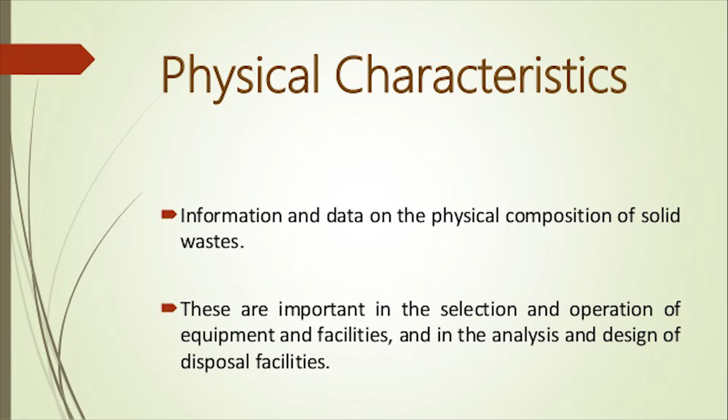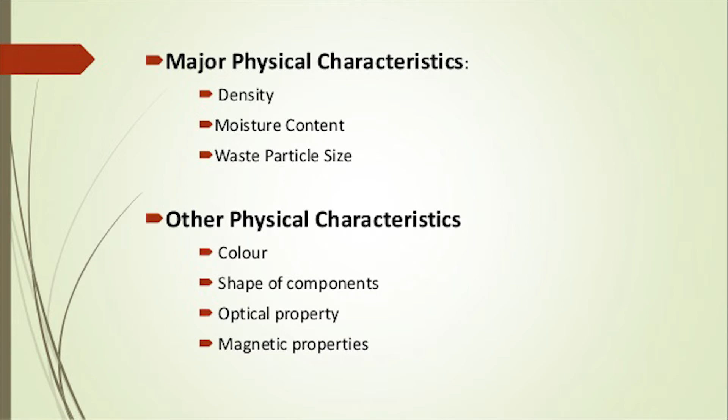The major physical characteristics measured in waste are density, size distribution of components, and moisture content. Other characteristics which may be used in making decisions about solid waste management are color, voids, shape of the component, optical property, magnetic properties, and electrical properties.

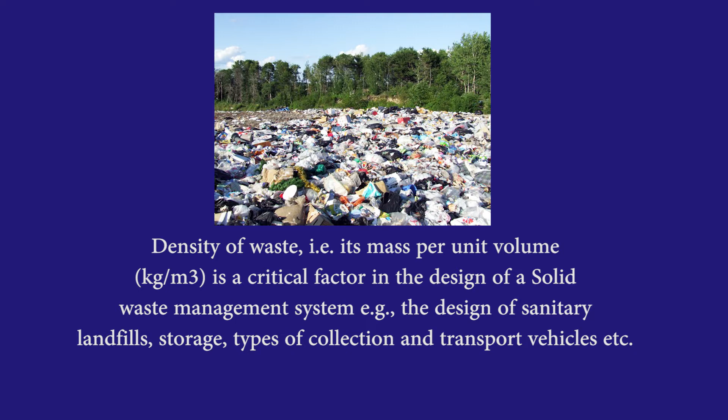Density, or specific weight: density of waste, that is its mass per unit volume, is a critical factor in the design of a solid waste management system. For example, the design of sanitary landfills, storage, types of collection and transport vehicles, etc.

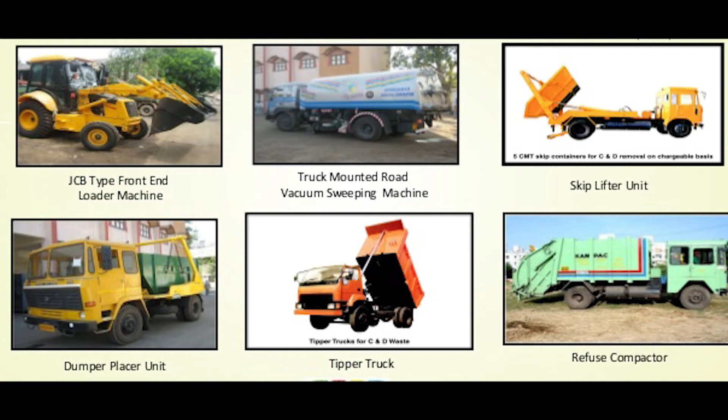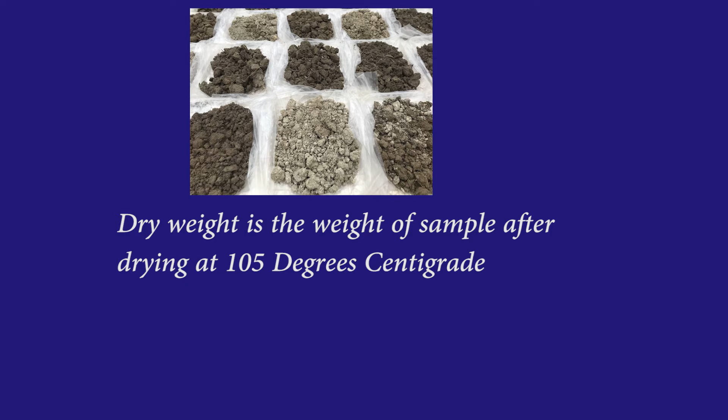Moisture content is defined as the ratio of the weight of water to the total weight of the wet waste. Dry weight is the weight of the sample after drying at 105 degrees centigrade. Moisture content is a critical determinant in the economic feasibility of waste treatment by incineration, because wet waste consumes energy for evaporation of water and in raising the temperature of water vapors.

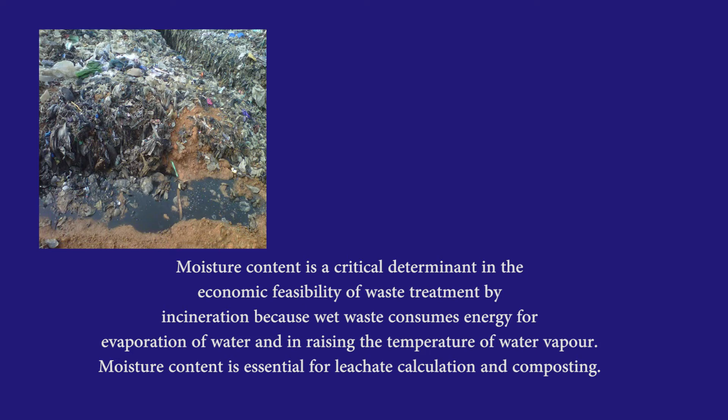Size: the size and size distribution of the component materials in solid waste are an important consideration in the recovery of materials. Measurement of size distribution of particles in the waste stream is important because of its significance in the design of mechanical separators and shredders.

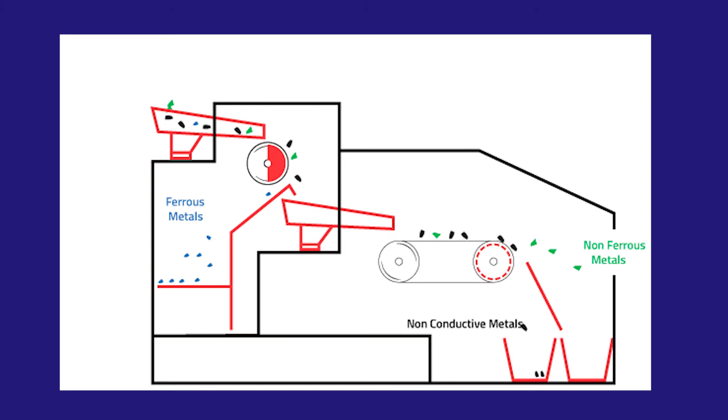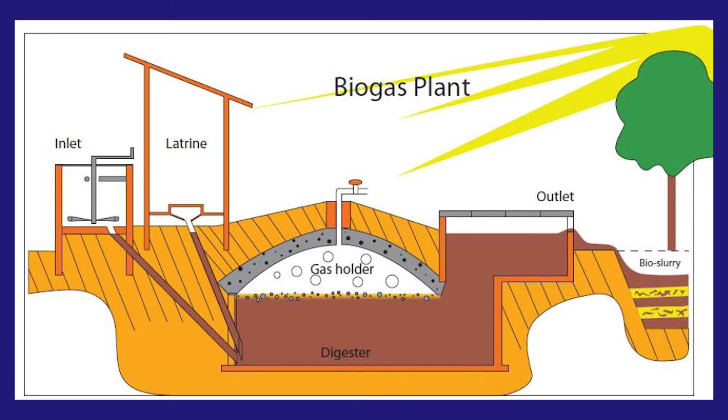Particle size will also influence waste packing densities, and particle size reduction could increase biogas production through the increased surface area available for degradation by bacteria. But smaller particles allow higher packing density, which decreases water movement, bacterial movement, and bacterial access to the substrate.

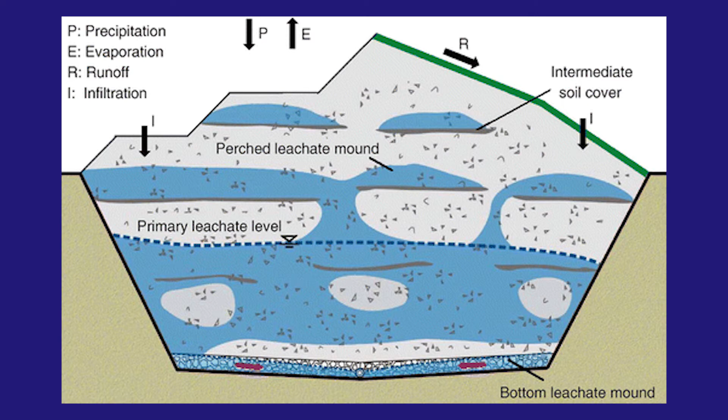Field capacity: the field capacity of municipal solid waste is the total amount of moisture which can be retained in the waste sample subject to gravitational pull. It is used to determine the formation of leachate in landfills. It is a critical measure because water in excess of field capacity will form leachates, and leachates can be a major problem in landfills.

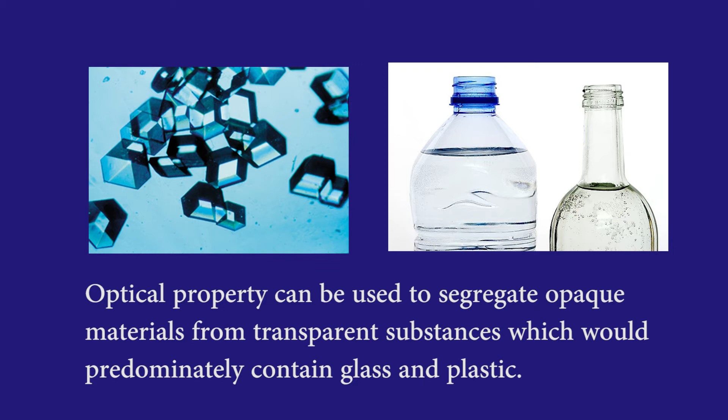Field capacity varies with the degree of applied pressure and the state of decomposition of the waste. Optical property can be used to segregate opaque materials from transparent substances, which would predominantly contain glass and plastic. Magnetic properties are used to design magnetic separators. Shape can be used for segregation, as flaky substance will behave differently compared to non-flaky substance.

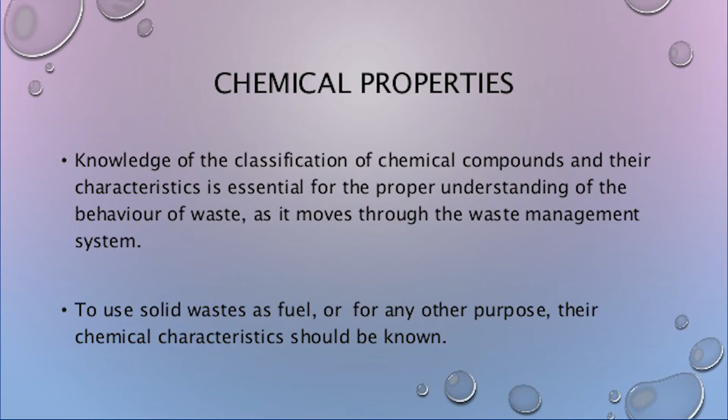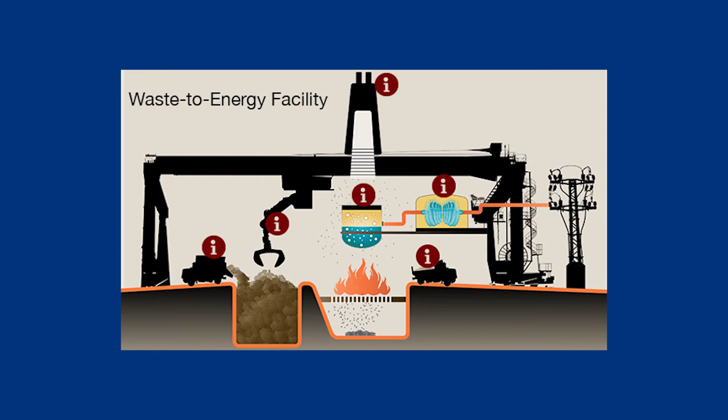Chemical characteristics: knowledge of the chemical characteristics is essential for the proper understanding of the behavior of waste as it moves through the waste management system. If solid waste is to be used as fuel or for any other purpose, we must know its chemical characteristics, including the following.

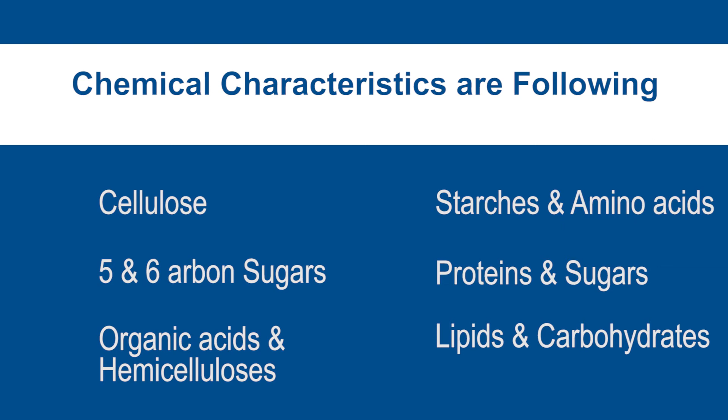It should include lipid, carbohydrates, protein, water-soluble constituents such as sugar, starch, amino acids, and various organic acids, hemicellulose, a condensation product of 5 and 6 carbon sugars, and cellulose, a condensation product of 6 carbon sugars.

Non-combustible matter: this class includes glass, ceramics, metals, dust, and ashes, and accounts for 12 to 25% of dry solids.

Composition of municipal solid waste: composition of municipal solid waste generated from various sources includes organic waste 60%, paper 10%, fine fractions 7%, plastic, wood and textile 5%, stone and clay 3%, glass 2%, rubber and leather 1%.

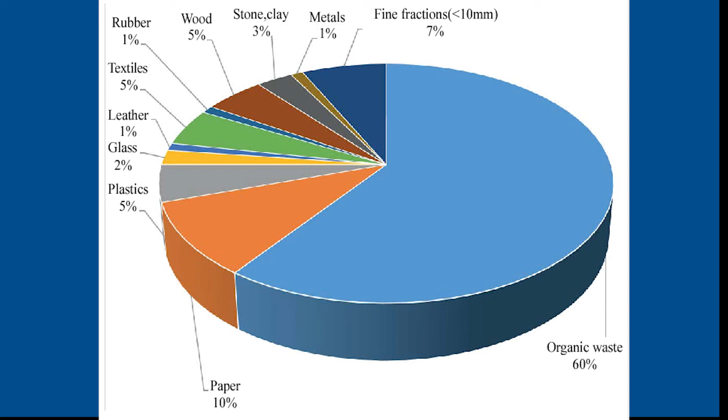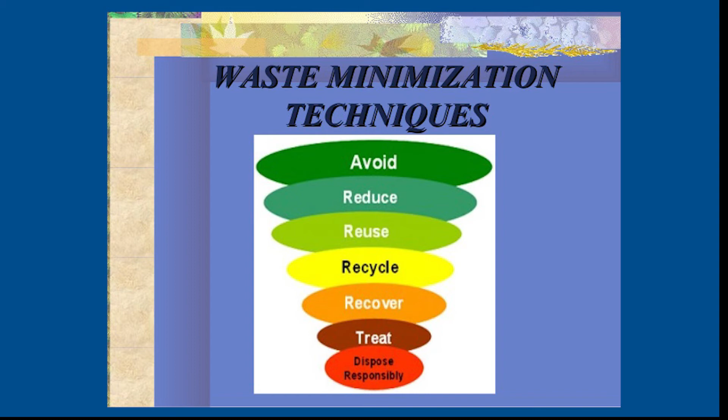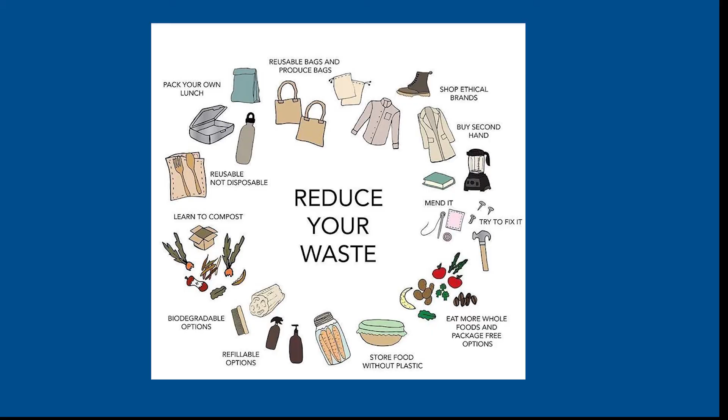Introduction to waste management approach: solid waste management has a twofold approach. First is the minimization of waste at the source, and the other is the control of environmental pollution during its storage, conveyance and disposal. If the production of waste can be reduced at the source level, it shall reduce the cost of conveyance, treatment, disposal, and shall save the environment.

The waste minimization techniques are grouped into 4 major categories for hazardous as well as non-hazardous waste. First, inventory management and improved operations, which includes inventorization and tracking of all raw materials, purchasing of lesser toxic production material, implementation of employee training and management feedback, and improving material receiving, storage and handling practices.

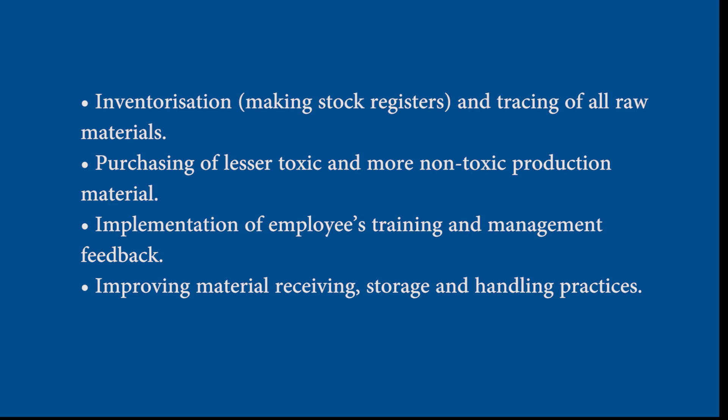Second, modification of equipment. This includes installation of equipment that produces minimum waste, modification of equipment to enhance recovery or recycling options, redesigning of equipment or production line to produce less waste, improving operating efficiency of equipment, and observing a strict preventive maintenance program.

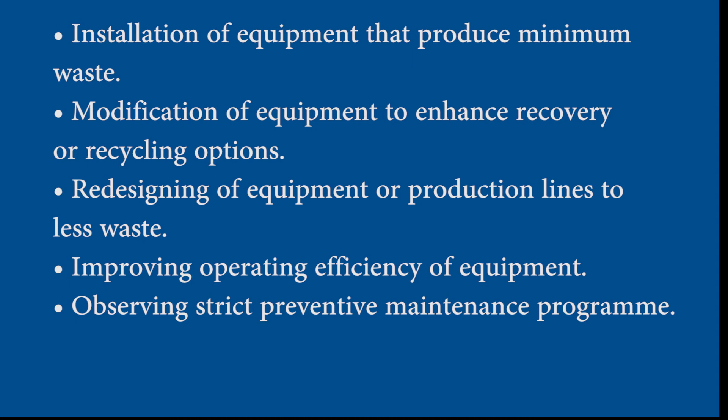Third, modifications in production process. This includes selection of non-hazardous raw materials, segregation of waste for recovery, identification and elimination of leakages, and optimization of reaction and raw material used.

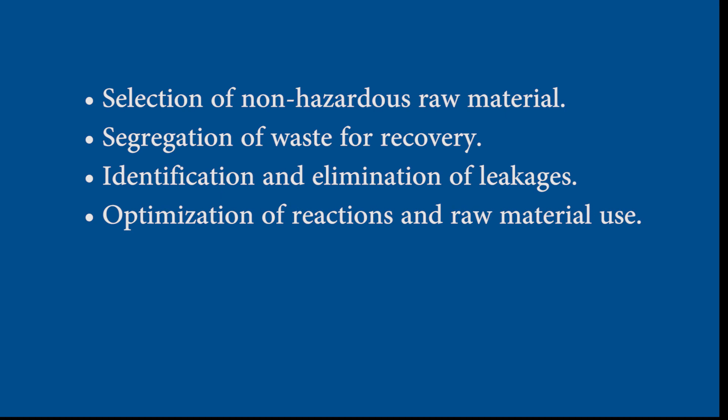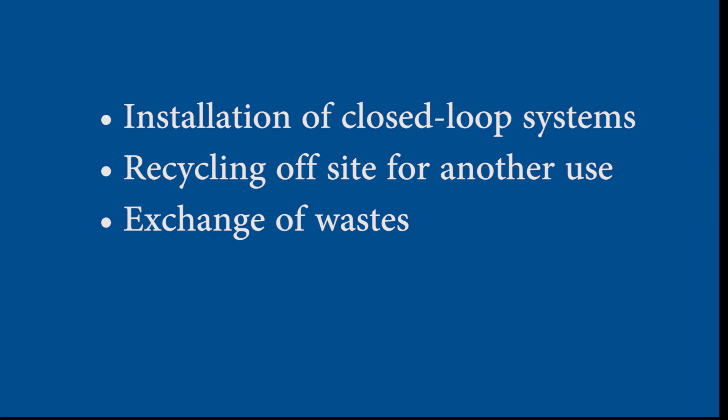Fourth, recycling and reuse, which includes installation of closed loop systems, recycling off-site for another use, and exchange of waste. By adopting these waste minimization techniques, waste is minimized at the source so that its handling and transportation charges are reduced, and lesser effort is needed for disposal.

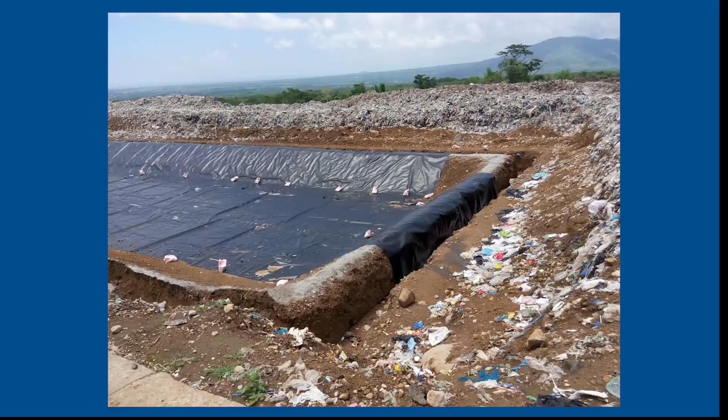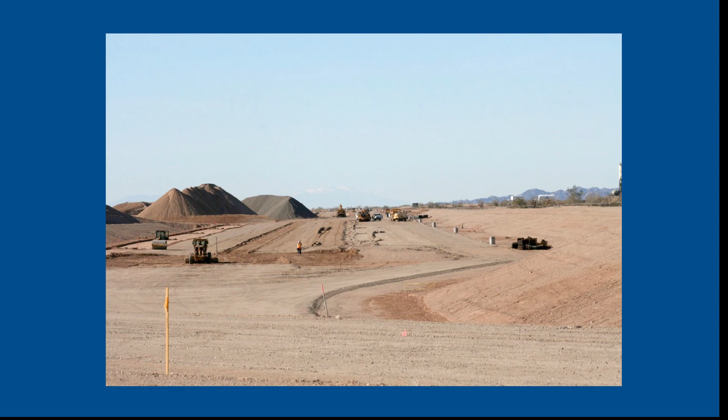Importance in waste management: in communities where appropriate sites are available, sanitary landfills usually provide the most economical option for disposal of non-recyclable refuse. However, it is becoming increasingly difficult to find sites that offer adequate capacity, accessibility, and environmental conditions. Nevertheless, landfills will always play a key role in solid waste management.

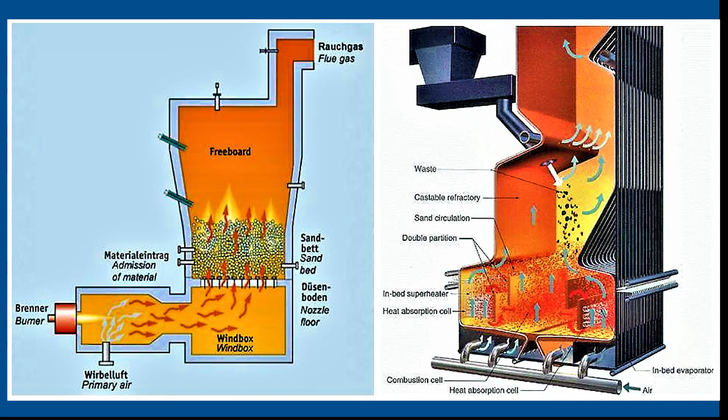It is not possible to recycle all components of solid waste, and there will always be residues from incineration and other treatment processes that will eventually require disposal underground. In addition, landfills can actually improve poor quality land. In some communities, properly completed landfills are converted into recreational parks, playgrounds, or golf courses.